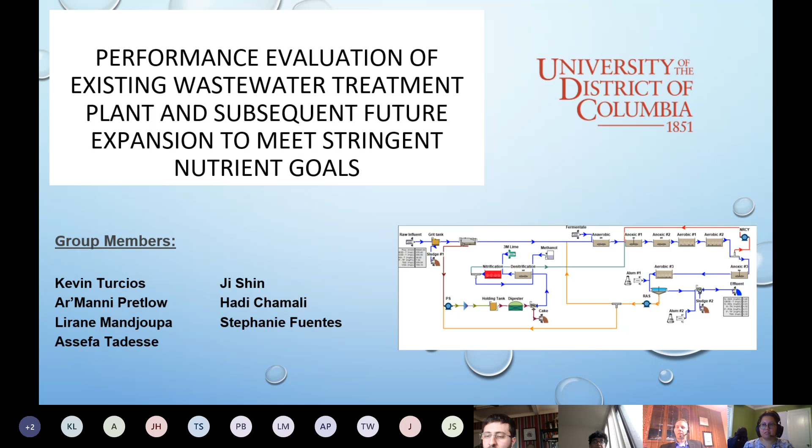We have two steps for our whole design. The first is for the present: performance evaluation of the existing wastewater treatment plant, where we try to meet goals for concentrations of specific constituents in the water like nitrogen and phosphorus. Step two is the subsequent future expansion to meet stringent nutrient goals for the future.

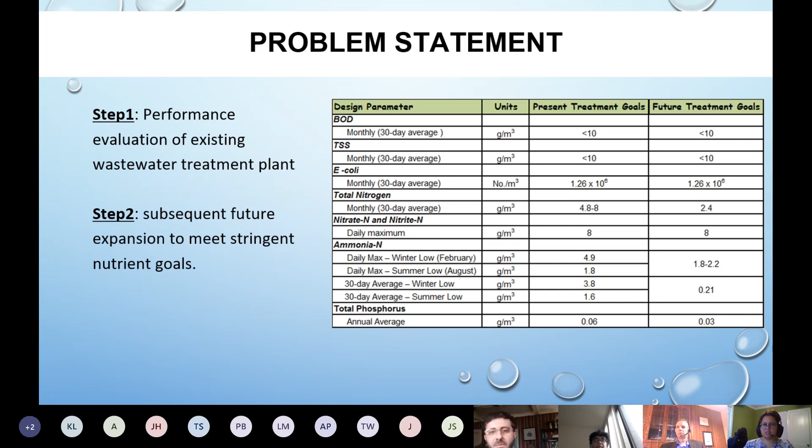Our system follows the NPDES permit limits, and we have to comply with that. Our system does not exceed the limits set by NPDES for things like E. coli, nitrogen such as ammonia, and phosphorus. That's for the present criteria and also for the future.

For the future, our system always tries to aim at doing better, trying to have less concentration of specific nutrients and things that are not good for our health. That's what our system will be focusing on more in the future, but it's also designed mainly for the present to fix whatever problems are there.

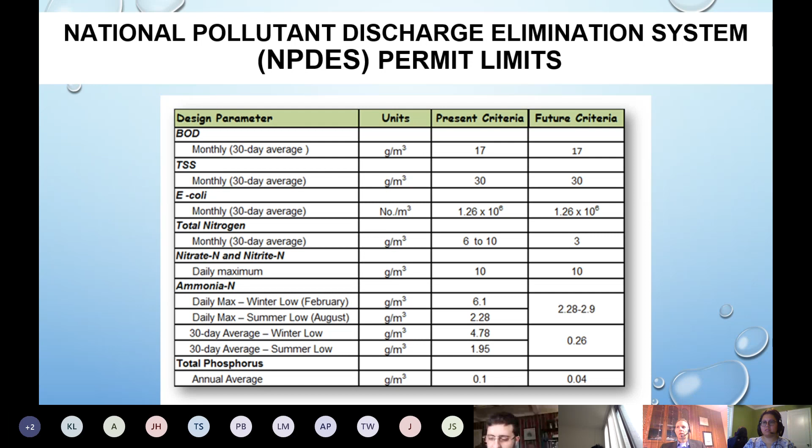This is the existing facility. The wastewater treatment plant is located in the western part of the United States, and it has two distinct treatments: the liquid stream train and the solid stream train. These are the parameters we used in our design.

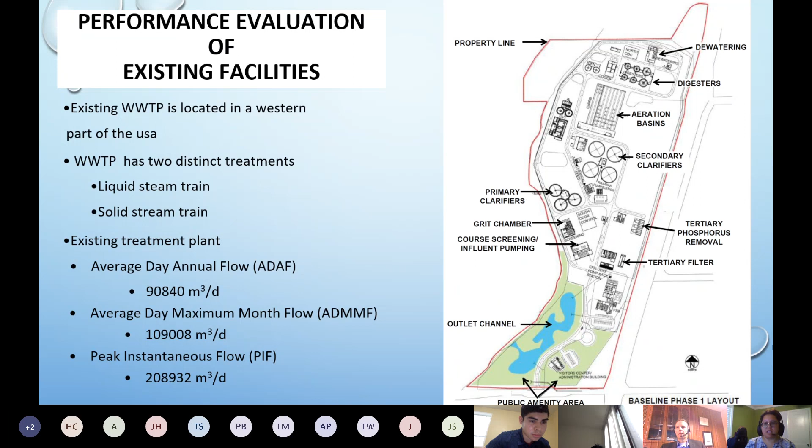The existing treatment plant had an average daily flow of 90,840 cubic meters per day, an average day maximum month flow of 109,008 cubic meters per day, and a peak instantaneous flow of 208,932 cubic meters per day.

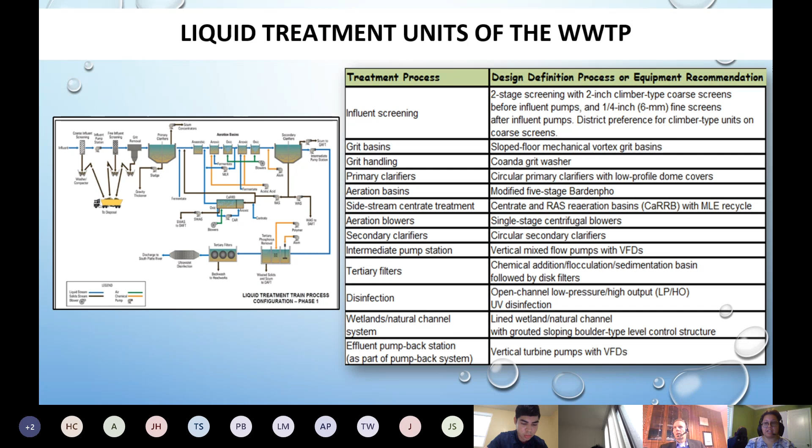This is the liquid treatment unit for the wastewater treatment system. It has an influent screen, grit basins, grit handling, primary clarifiers, an aeration basin, side stream treatment, blowers, a secondary clarifier, a tertiary filter, disinfection, wetlands and natural channel systems, and an effluent pump-back station.

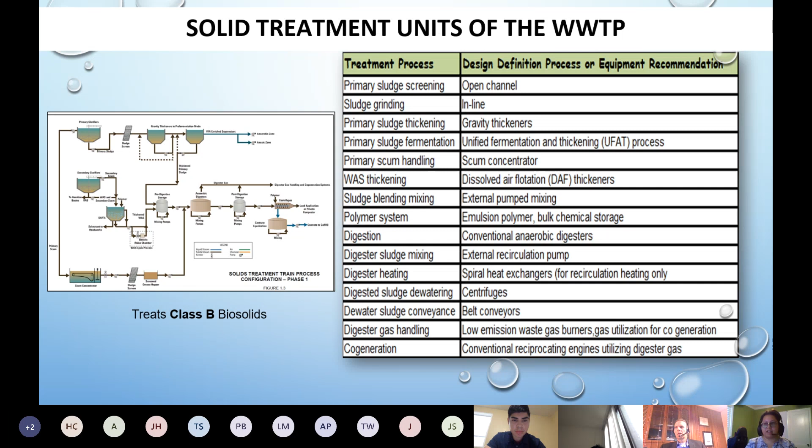The solid station actually treats Class B biosolids and has its own units: primary sludge screening, sludge grinding, primary sludge thickening, primary sludge fermentation, a polymer system, digesters for sludge mixing, heating and dewatering, a digester gas conveyance system, and a cogeneration unit.

In our design, our three main goals were to make sure biological nitrogen and phosphorus were removed. We had a tertiary treatment so any other material inside the wastewater could be treated, and a sludge treatment, because after all this we had sludge remaining in the end.

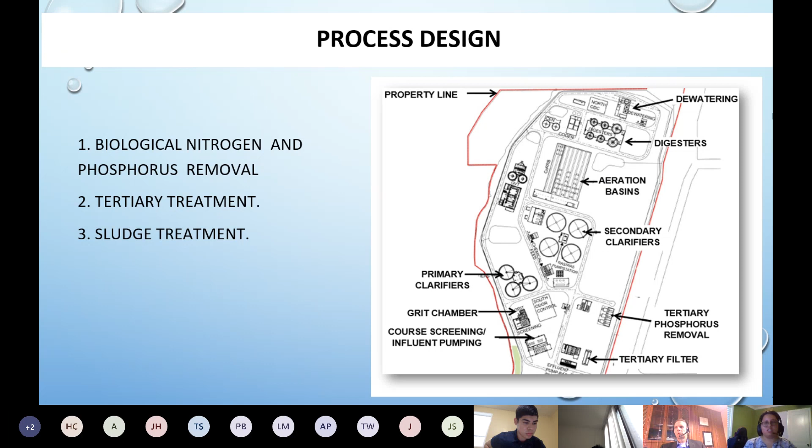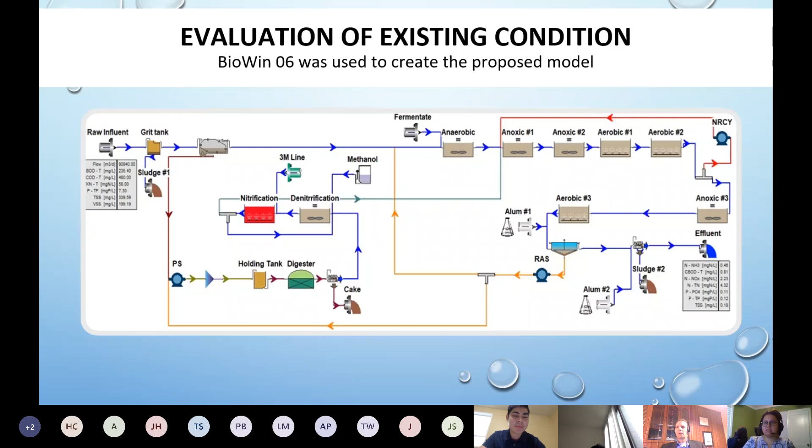Kevin, we cannot hear you. Lirane? Kevin?

While designing our wastewater treatment plant, we had to meet the following objectives: maintain total nitrogen concentration between 4.8 and 8 milligrams per liter, biological oxygen demand less than 10 milligrams per liter, total suspended solids less than 10 milligrams per liter, and total phosphorus less than 0.1 milligram per liter.

Our ammonia had to be between 1.6 and 3.8 milligrams per liter, and our nitrite and nitrate had to be between 1.6 and 3.8 milligrams per liter.

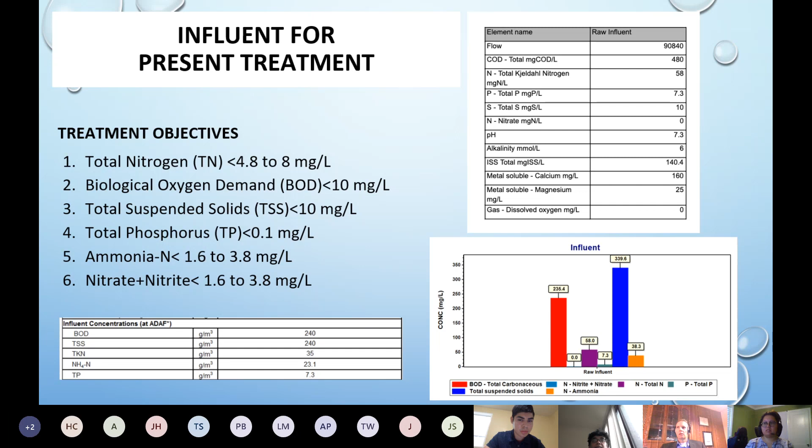As Stephanie mentioned before, we had a flow of 90,840 cubic meters per day. Our chemical oxygen demand was the combination of the biological oxygen demand and total suspended solids, and to get our total Kjeldahl nitrogen we had to combine our TKN and our ammonia nitrate. As you can see in the next slide - Stephanie, can you move to the next slide?

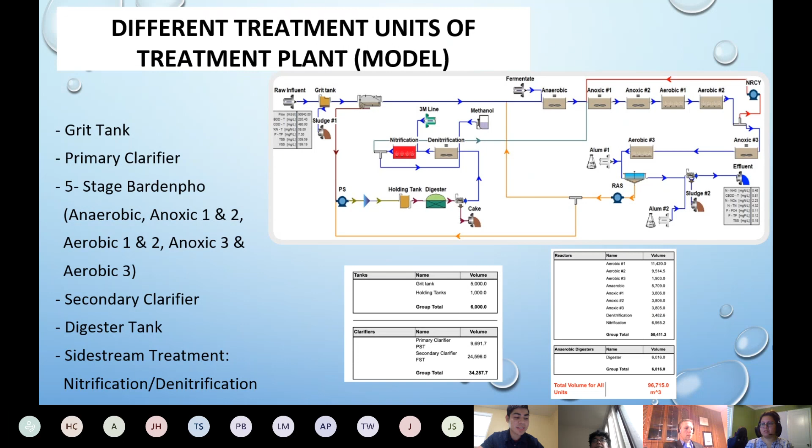This is the first stage of our BioWin model and what is required by the project description. The first thing is the introduction of raw influent coming into the treatment plant from homes and businesses. Then water enters our grit tank, which removes inorganic solids from the raw wastewater before entering the primary clarifier. It then enters our primary clarifier.

However, we use a settler in our BioWin modeling because it was more effective in removing organic solids. In this stage, it creates a hydraulic line and also a sludge line.

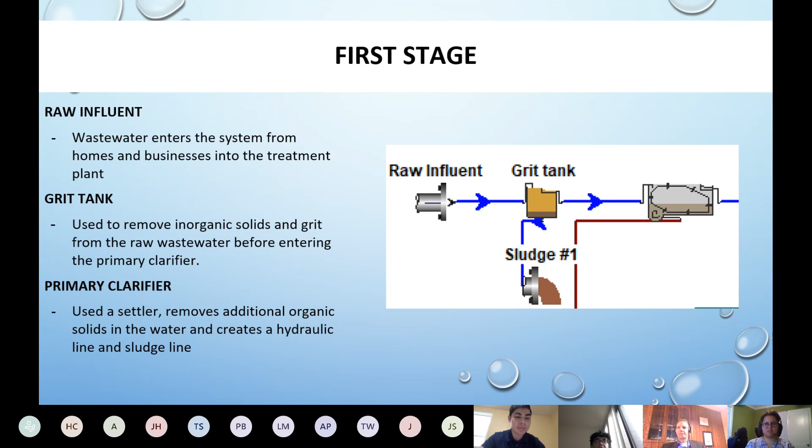The second stage of our BioWin model is the 5-stage Bardenpho, which removes nitrogen and phosphorus from the water. It first passes the anaerobic tank, where polyphosphate accumulating organisms release phosphorus and capture volatile fatty acids. Water then enters anoxic 1 and 2, aerobic 1 and 2, anoxic 3, and aerobic 3.

In the aerobic tank, phosphorus is absorbed and volatile fatty acids are released. It also removes chemical oxygen demand to CO2 and converts ammonium to nitrate. In the anoxic phase, nitrate is converted to nitrogen gas.

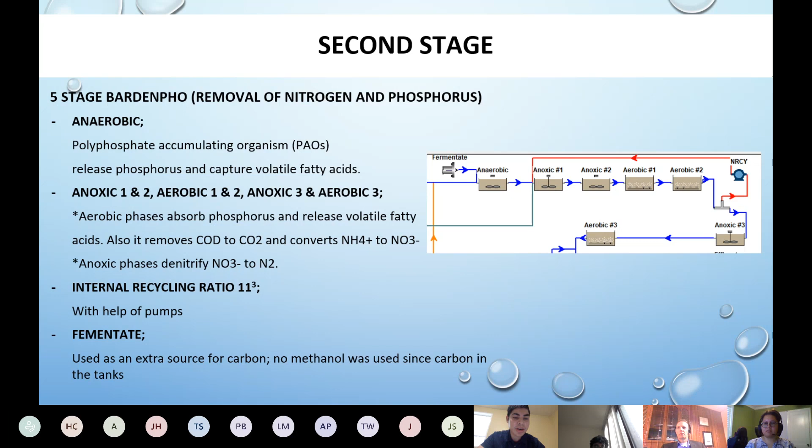We also had to insert internal recycling, and the ratio was 11 cubed, which was helped with pumps. We also had to introduce fermentate to provide an extra source of carbon, and we did not decide to use methanol because there was already some carbon in the system.

This is the third stage of our BioWin model. Before entering our secondary clarifier, we introduced 190.4 kilograms a day of aluminum sulfate to remove excess phosphorus.

It then enters our secondary clarifier, where we remove biomass from the tank from the final effluent, and then send some of the sludge to the digester for further processing.

Before leaving the influent, we added a dewatering unit which removes excess sludge and separates the water. It then enters our effluent. However, before exiting, typically we have to introduce a disinfectant such as chlorine, and then we have to dechlorinate with sodium sulfite and bisulfite.

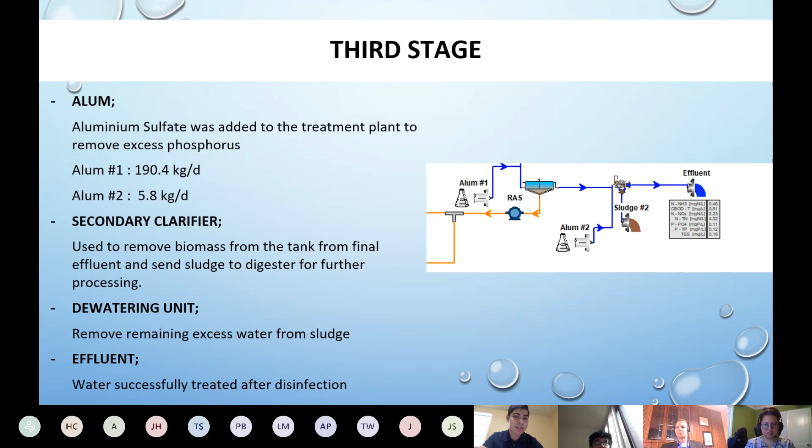This is more detail of our sludge process for our model. The first thing is all the sludge enters through our pumps where it's sent to our holding tank. We input a holding tank in our system to not overwhelm the digester. Then the sludge enters the digester where it breaks down organic waste from the clarifier.

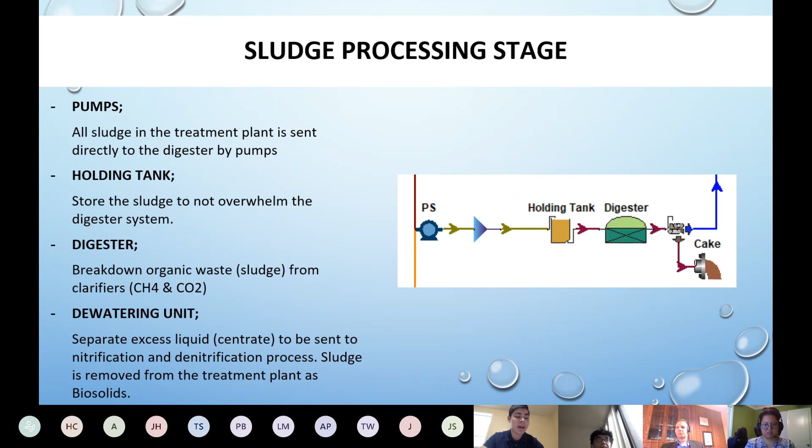It then enters the dewater unit, which separates excess liquid or centrate to be sent to the nitrification and denitrification process. Sludge is removed from the treatment plant as biosolids.

This is our side stream treatment process of our model, which is basically our nitrification and denitrification stages, where we remove nitrogen from the centrate of the sludge, and we recycle some of it back to the first stage, which is our grit tank stage.

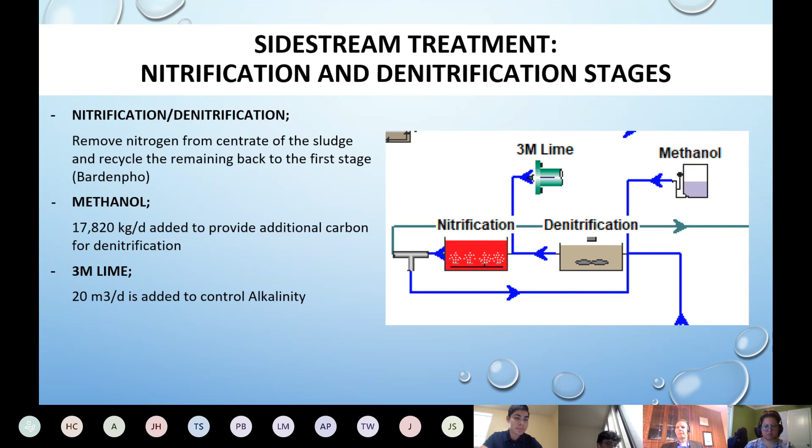In this stage, we also had to introduce methanol, and we introduced 17,820 kilograms a day of methanol to provide additional carbon for denitrification. We also added a 3M lime to control alkalinity in the water.

Based on our model, we were able to meet the present treatment goals. For total nitrogen, our goal was to fall between 4.8 to 8 milligrams per liter. As you can see in the purple, it's 4.3, which falls below that range.

For our biological oxygen demand, it had to be less than 10 milligrams per liter. As you can see, the red is 0.8 milligrams a liter, so it successfully passes.

Our total suspended solids, again, had to be less than 10 milligrams per liter. As you can see, the blue is 0.2, which falls below that range. And for our total phosphorus, had to be 0.1 milligrams per liter, which in the orange, meets the criteria.

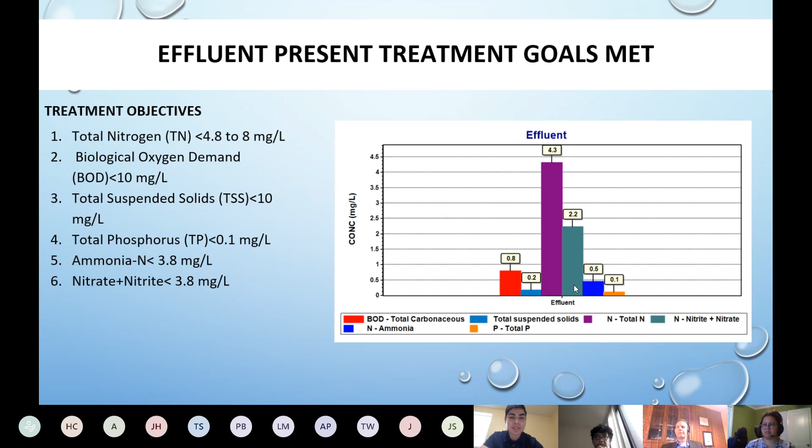Ammonia had to fall less than 3.8 milligrams per liter. As you can see in the blue, it is 0.5 milligrams per liter. And finally, nitrate had to be less than 3.8 milligrams per liter, and in our system, it was found to be 2.2 milligrams per liter.

We also calculated the solid retention time and the hydraulic retention time of our system. The total solid retention time of our system was found to be 4.98 days, or 5 days. We also calculated the solid retention time of the aerobic tanks, and it was found to be 2.82 days. We then calculated the total hydraulic retention time for the whole system, which was found to be 10.56 hours.

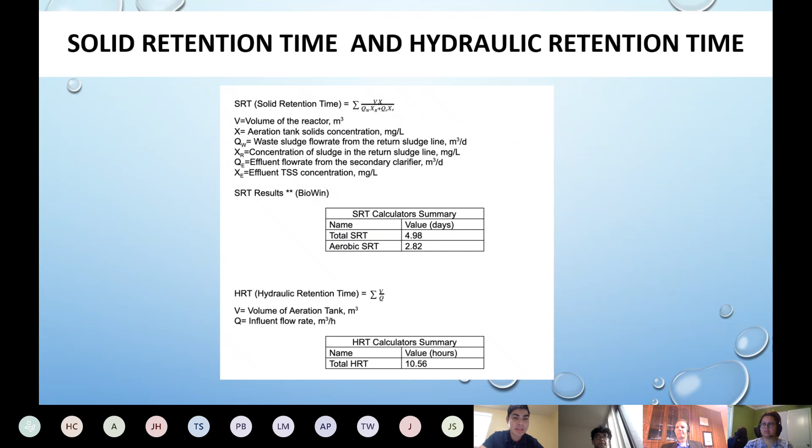To design our model to meet the future criteria, we tried to improve our model using chemicals only.

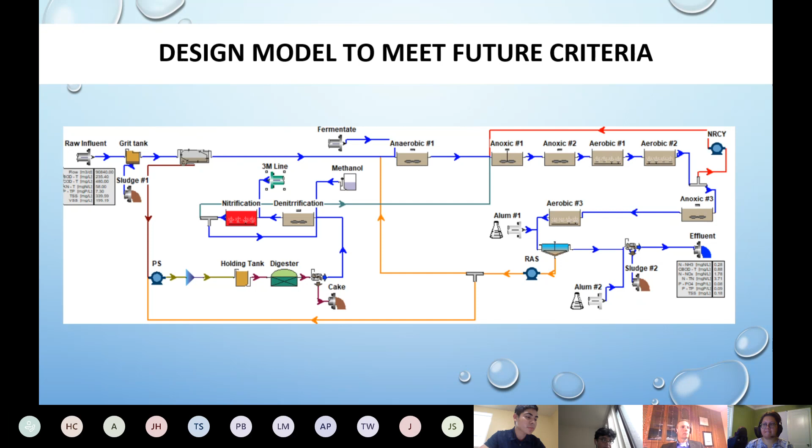Next slide. So two of the main chemicals we were trying to change and test out to improve the quality and efficiency of our system was to basically work around with methanol and alum. So as you can see, for methanol we were able to decrease to 11,880 kilograms per day. And alum, we had an increase to 230.8 kilograms a day.

And for the alum number 2, which is right before exiting our effluent, it remained the same.

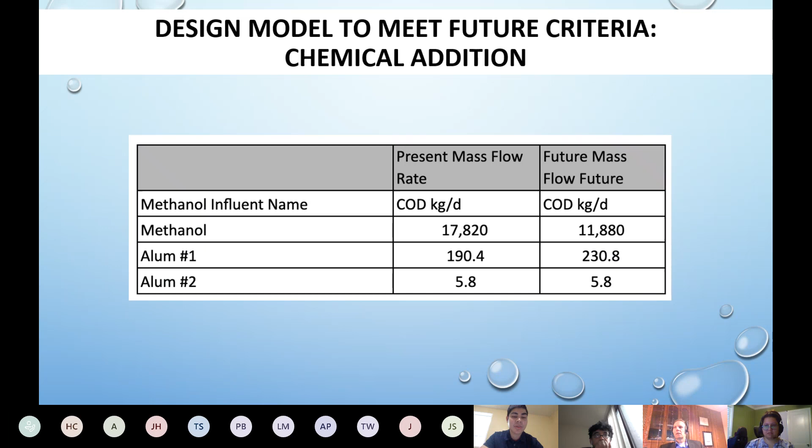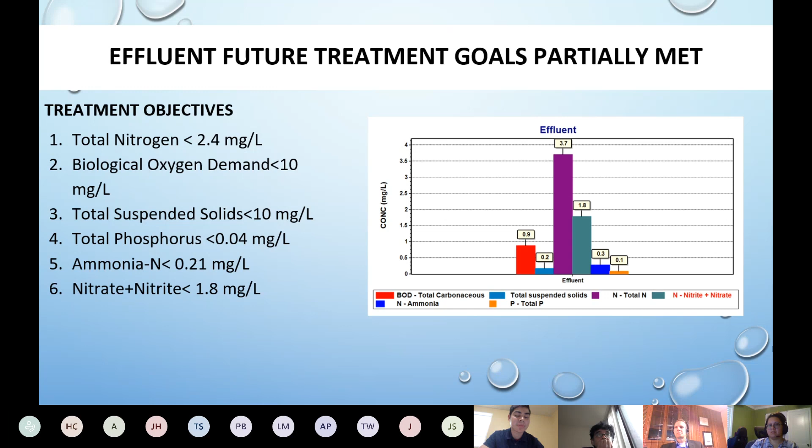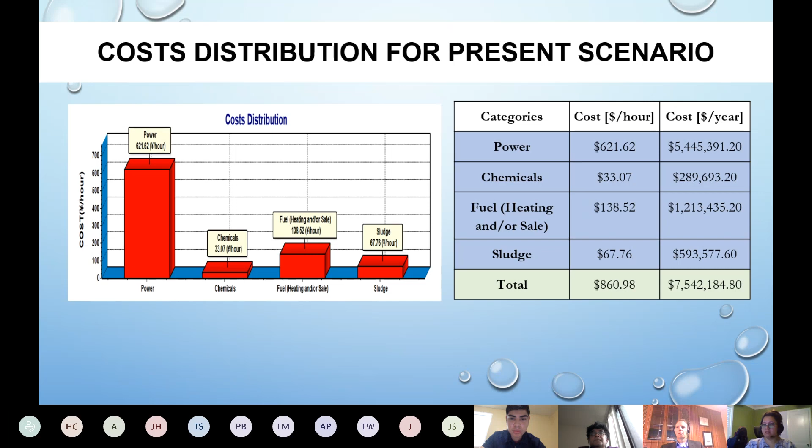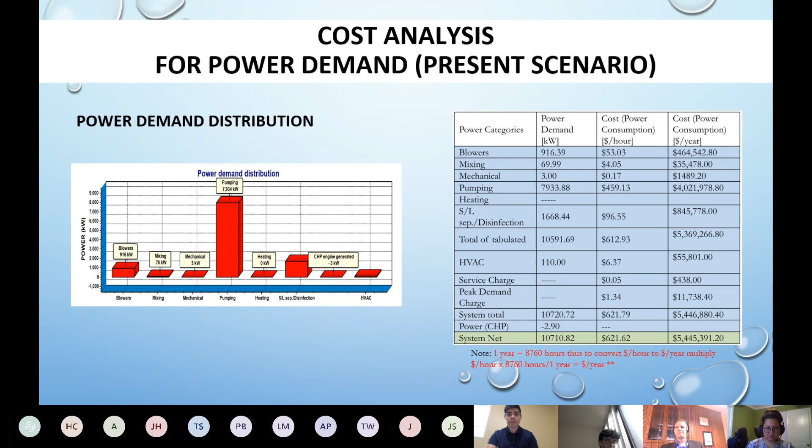Next slide. And also for our cost analysis, we see that most of our power demand falls into pumping, which means that most of the power is spent on pumping, and that is 7,933 kilowatts, which gives us $459 per hour and $4,021,978 per year.

Okay, sorry. Our alternative techniques to meet our future criteria - since we couldn't meet our nitrogen and phosphorus goals, we looked into alternative techniques.

The six ones that we did investigate were IFAS, an integrated fixed-film activated sludge; SHARON, which is a single reactor system for high activity for ammonium removal over nitrite; Anammox, which is anaerobic ammonium oxidation; ANITA Mox, which is like the Anammox process; MBR, which is a membrane bioreactor; Ostara Pearl reactor; and a phostrip process.

I'll hand it over to Armani. The IFAS is a free-floating medium added to an activated sludge basin that helps enhance the treatment process by stimulating the growth of biomass on the media. Also, aeration is used during the activated sludge process - it is when air is added to water to help promote microbial growth.

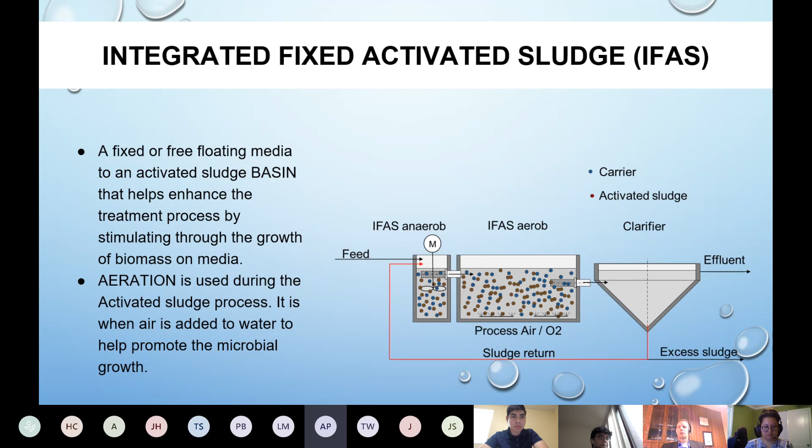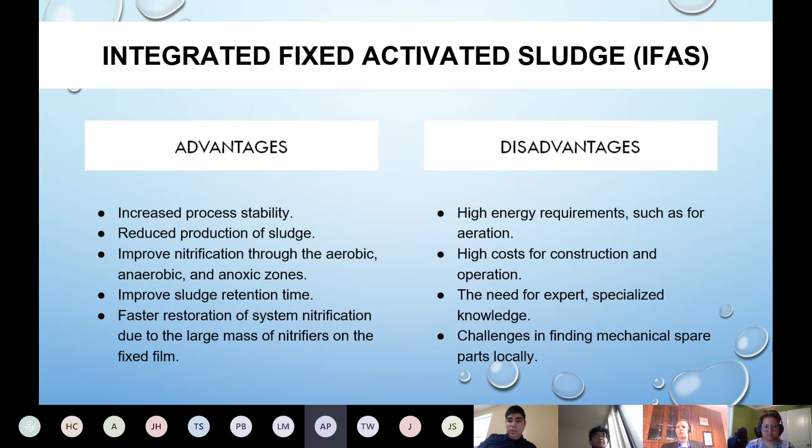Next slide. Some advantages and disadvantages of IFAS would be that it increases process stability and improves sludge retention time. A disadvantage would be that it costs a lot to construct and operate this system.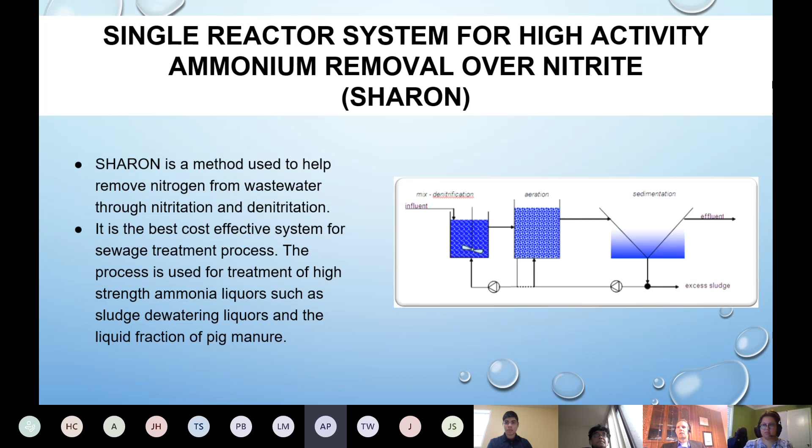Next slide. Some advantages of SHARON will be that activated sludge systems for nutrient removal are flexible, robust, and cost-effective for treatment of household and industrial wastewater. A disadvantage would be that biological nutrient removal is very tedious and requires the main parameters to be constantly supervised.

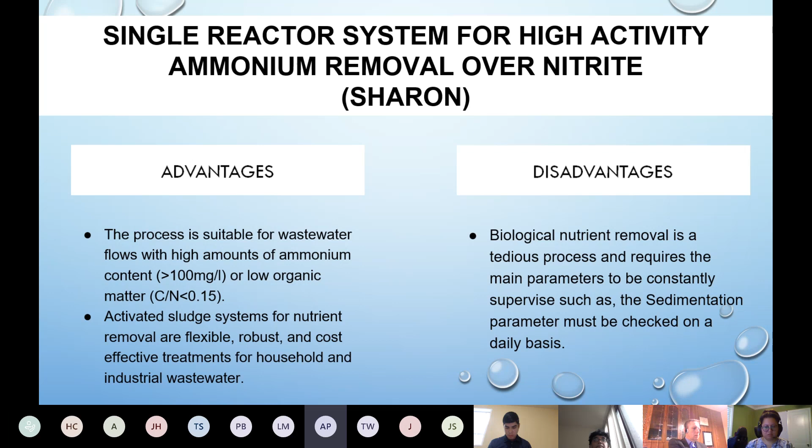Next slide. As Armani just discussed, those are two methods of ammonium removal from wastewater. Anammox is another method for ammonium removal. Anammox stands for anaerobic ammonium oxidation, and this is a process which was discovered in 1999 that occurs due to a special type of bacteria.

This is a two-step process. In the first step, half of the ammonium present in the wastewater undergoes nitrification and becomes nitrite, hydrogen, and water. In the second step, the remaining ammonium in the wastewater, along with the nitrite that was just created, is processed by these special bacteria to make nitrogen gas and water.

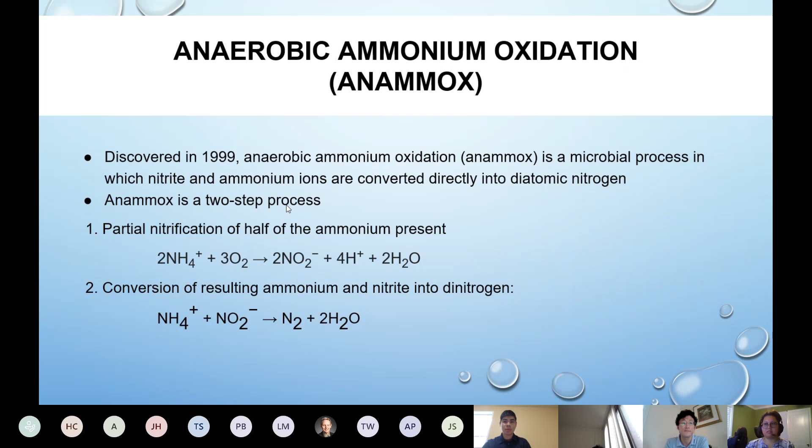Next. Some of the advantages of anammox are that although it occurs in two separate steps, both steps can occur in the same vessel or tank, reducing cost of installation, along with less energy consumption - because in the first step aeration is required, but since you only have to convert half the ammonium to nitrite, it requires less energy.

Some of the disadvantages are that these bacteria are slow to grow - they take 10 to 14 days to double. That's a problem because if there is accidental sludge loss, it takes a relatively longer time for the system to recover.

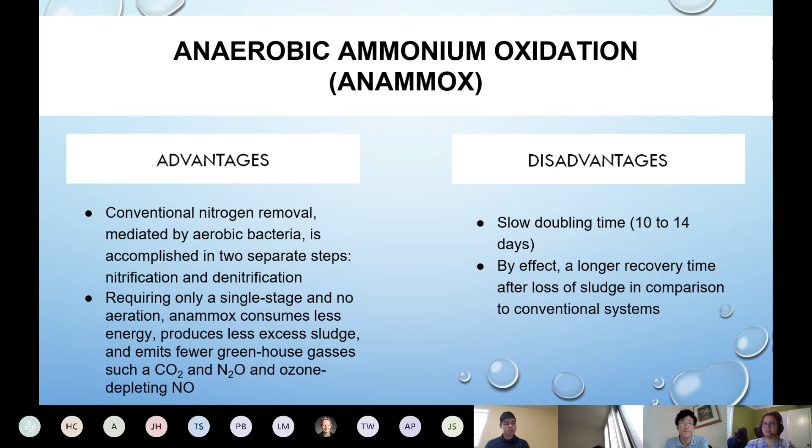Next. ANITA Mox is essentially a trademark on anammox - it's an application of anammox. It employs anammox along with MBBR, moving bed biofilm reactor. Essentially, anammox is grown on floating media, which makes the system more efficient. It incorporates the same nitritation and anoxic ammonia oxidation as anammox does.

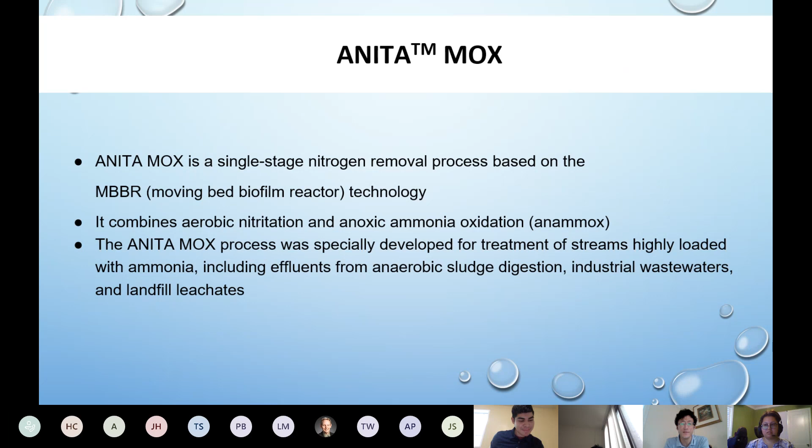Some advantages of ANITA Mox are that it is more economical and takes up less space due to employing MBBR. It produces 90% less sludge production, meaning less sludge needs to be taken away from the facility and treated. It uses 60% less energy consumption due to less aeration being needed, and also requires no carbon source in the denitrification process. The disadvantage is that it is more expensive to set up initially.

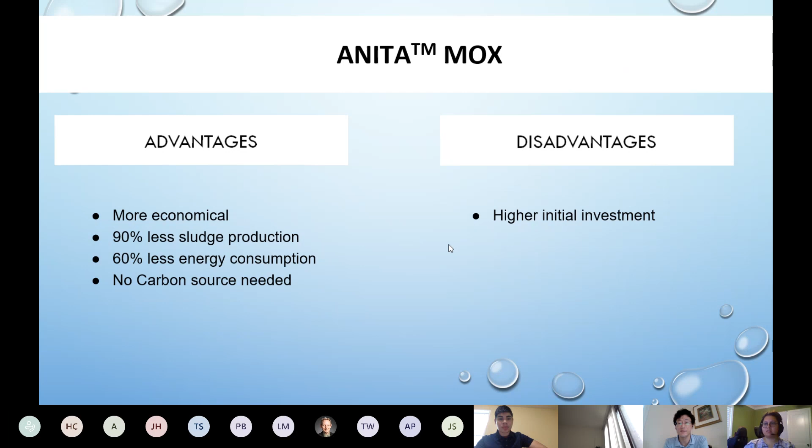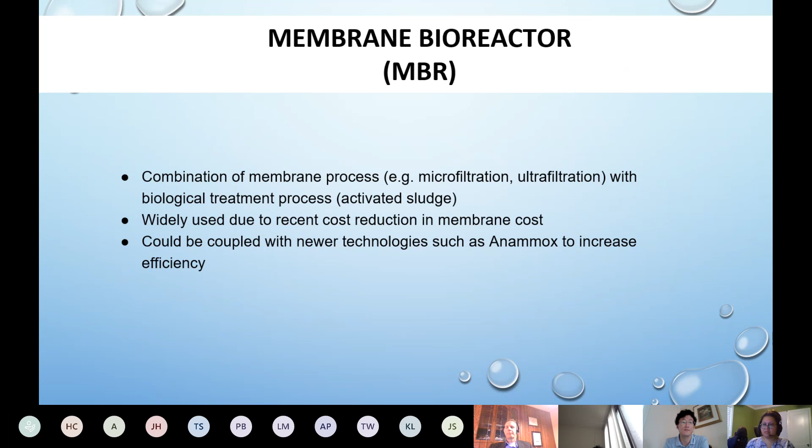Next, the membrane bioreactor, or MBR, combines membrane technologies such as microfiltration and ultrafiltration with the biological treatment process. It's become more widely available due to recent cost reductions in membrane production costs.

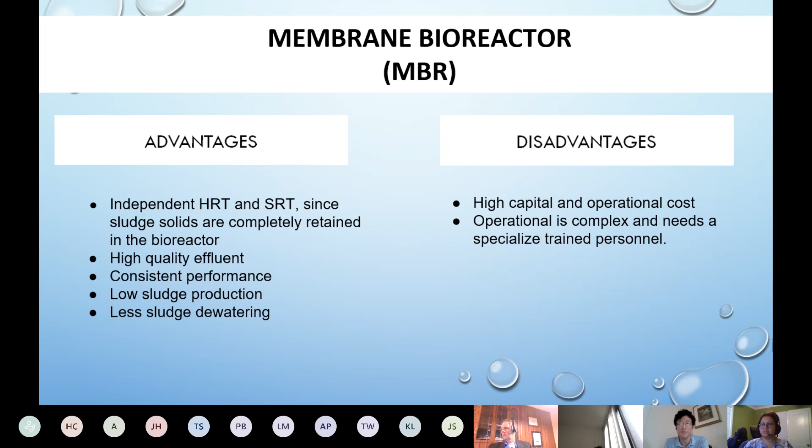Some advantages are that the hydraulic retention time and solid retention times are independent, the effluent is of high quality, and it's fairly simple, so it's consistent in performance, although there is some maintenance. It produces low sludge amounts and requires less sludge dewatering. The disadvantages are similar to other methods: higher capital and operational cost, and the operation of the membranes especially is complex and requires specialized personnel.

So we've been talking about ways to remove ammonium from the wastewater. Another contaminant of concern is phosphorus. This is the chemical that causes dead zones in our waters, where nothing but plants essentially grow.

The Pearl reactor addresses this phosphorus level - it's a self-contained tank that you can attach to any wastewater system, and it controls phosphorus by removing it through the precipitation of struvite, which is magnesium ammonium phosphate.

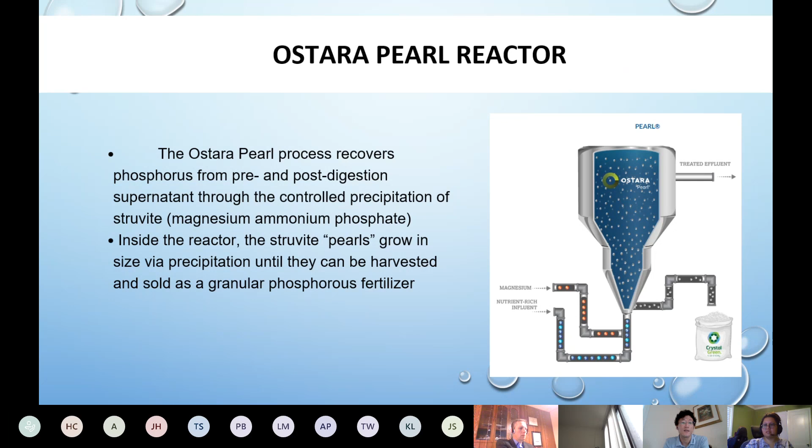Some advantages are you remove phosphorus from wastewater, which helps reduce eutrophication of receiving water. And you can sell these struvite crystals as fertilizer. It's a very pure phosphorus fertilizer, so they're already registered and available as a commercial fertilizer. Although the disadvantage is the higher initial investment, it can be recouped through fertilizer sales.

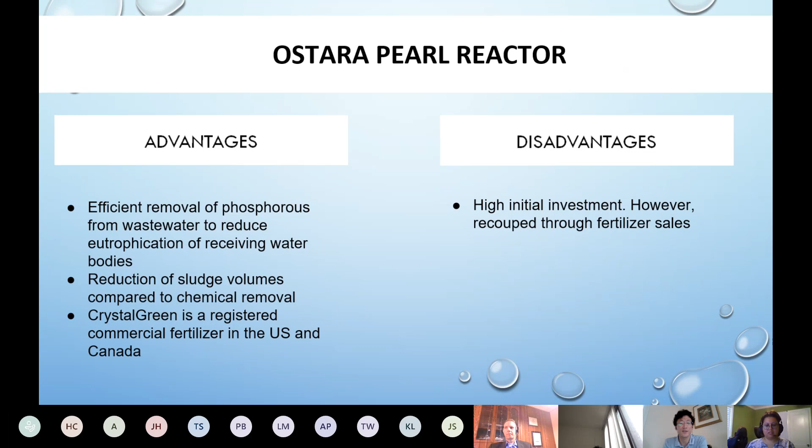The phostrip process is a method where the microorganisms in the activated sludge are bioaccumulated and secrete phosphate. This is a side stream process where only a part of the recirculated sludge is passed through the anaerobic tank, and the mainstream is where all the sewage is passed through the anaerobic tank.

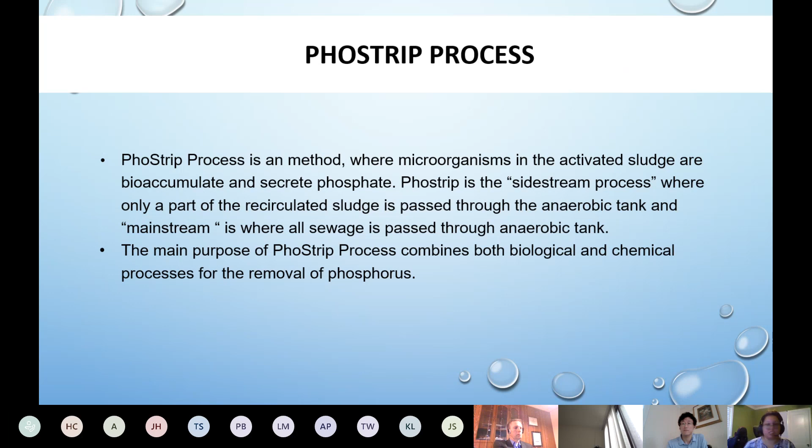The main purpose of the phostrip process combines both biological and chemical process for the removal of phosphorus, which is what we really needed in our system. The advantages of the phostrip process: no additional heavy metals contaminating the sludge, no negative effects on the acid capacity, no additional salinization of receiving water course, less chemical cost, less chemical storage or handling, and unaffected by fluctuations in treatment plant influent.

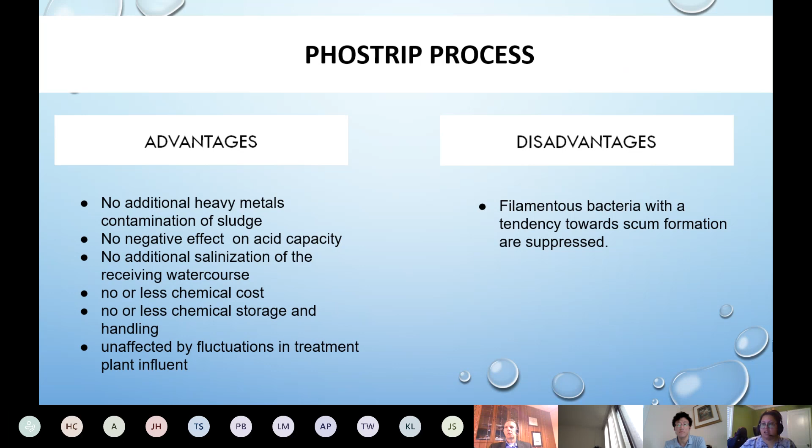From these techniques and all these advantages, we are able to utilize them to meet our present and future criteria. Since we could not remove all the nitrogen and phosphorus for our future criteria, we plan to use it in the future so we can make our system better, more cost efficient, and meet all our criteria goals. This is our system.

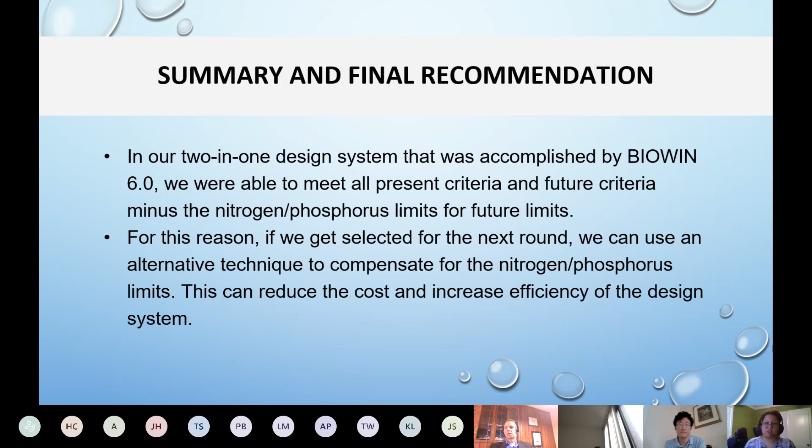It was a two-in-one system, and it was accomplished using BioWin 6.0. We were able to meet all the present criteria and some of our future criteria, minus the nitrogen and phosphorus limits. For this reason, if we are selected for the next round, we will be able to use the alternative techniques we learned to compensate for the nitrogen and phosphorus limits. This can help reduce costs and increase the efficiency of our design system.